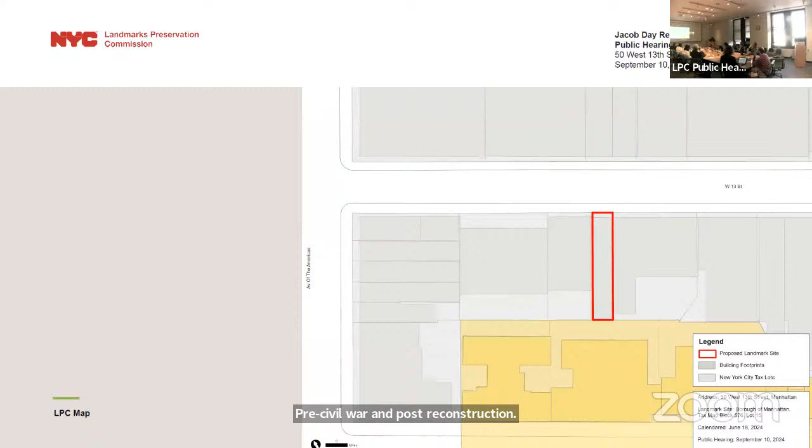The building is located on West 13th Street between 5th and 6th Avenues, just north of the Greenwich Village Historic District. The proposed landmark site is the tax lot.

Jacob Day was a significant figure, both as an abolitionist and a prominent businessman before the Civil War. Abolitionism was a dangerous activity for Black individuals, but despite the risks, Day was a member of the American Anti-Slavery Society, a contemporary of other distinguished abolitionists of the day, and a member of Abyssinian Baptist Church at 166 Waverly Place, a strong supporter of abolition and African-American civil rights that was targeted during the 1863 draft riots.

Day was a successful caterer when this was one of the few profitable business opportunities Black men could pursue. He was a member of the Freedmen's Bank, founded after the Civil War as a means of improving economic prospects of African Americans, and a member of the Caterers Club, along with other Black entrepreneurs who made a name for themselves at that time.

Eventually becoming an affluent property owner, Jacob Day was considered part of New York City's Black elite in the 19th century, at a time when African Americans faced substantial barriers to the building of wealth. He had begun to own real estate as early as 1846 through a land grant in upstate New York given by abolitionist Gerrit Smith, a fellow member of the Anti-Slavery Society, and later owned property in Brooklyn and Long Island. At the time of Jacob Day's death in 1884, he was worth an estimated $200,000, equivalent to nearly $6 million today.

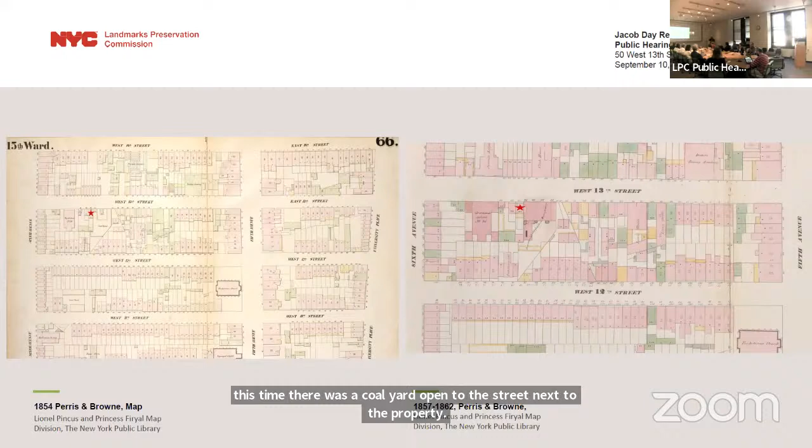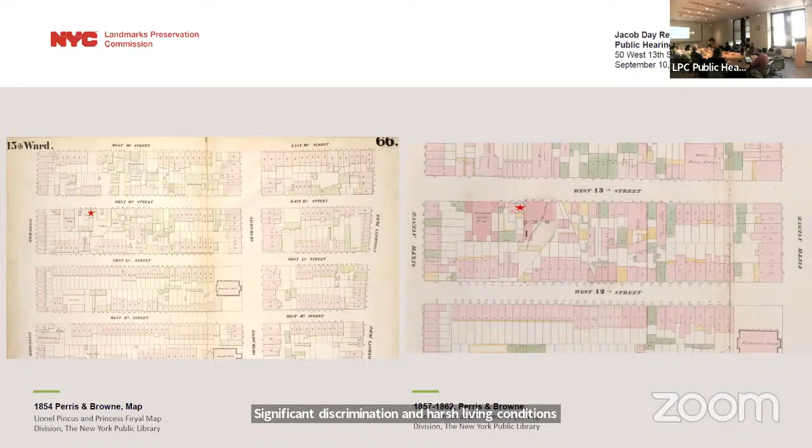At this time, in the mid-19th century, despite significant discrimination and harsh living conditions, Greenwich Village became home to many Black residents, businesses, schools, churches, and benevolent societies. The area around Minetta Lane and Bleecker Street, south of Washington Square, became known as Little Africa.

Census records indicate that Jacob Day rented additional rooms to other African Americans.

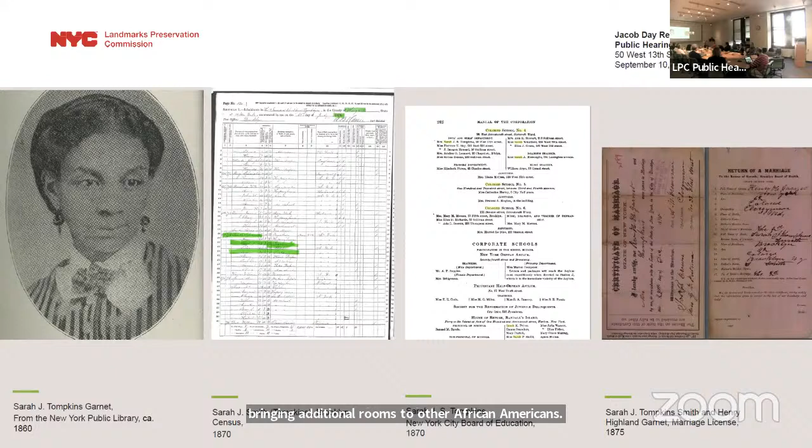According to Board of Education records, prominent educator, abolitionist, and later suffragist Sarah J. Tompkins Garnet resided at 50 West 13th Street from the 1860s to 1874. During that time she was a teacher, and in 1863 was appointed one of the first Black female principals in the New York City public school system, at Colored School Number 4, a designated New York City landmark.

The row house is a rare example of 19th century Greek Revival style building. It retains its 19th century form, materials, and facade configuration from the 40-year period of association with Jacob Day and his family.

After Jacob Day's heirs moved out of the house in 1896, the house had various owners until the 1950s. In 1959, 50 West 13th Street was renovated to create a theater in the basement, a school on the first floor, and apartments above. Among various tenants in the middle of the 20th century, in 1968 a groundbreaking four-member Afro-American folklore troupe had a residency at the theater, performing poetry, folklore, and works of well-known Black writers James Weldon Johnson, Gwendolyn Brooks, LeRoi Jones, and Langston Hughes.

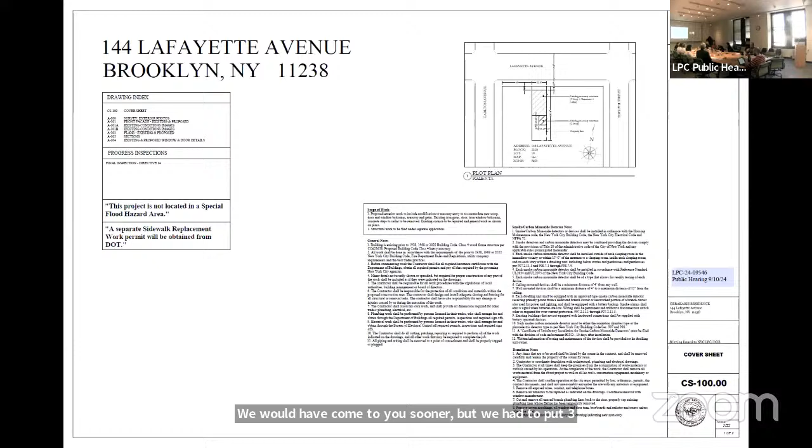This is a brownstone in the Fort Greene area. The top right photo shows the 1941 tax lot photo. Our building is the center one. The building to the right no longer exists, and the building to the left is still intact. Our intent is to focus on the lower floors, the street level and first floor, and bring it back to its original condition. We are the only house on the block without a stoop, and we'd like to complete the look of the block.

The bottom photos show our house to the right, 144. You can see there is no stoop; the areaway is just a concrete pitched patch that's broken and prone to rodents and other problems. The building on the left has a stoop and is a rental unit, but much of its detailing is still intact. The building to the far left, 148, has a stoop but has had some alterations over the years.

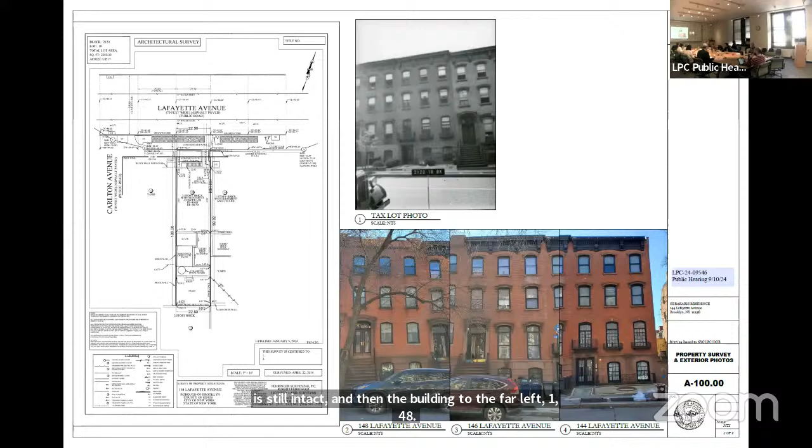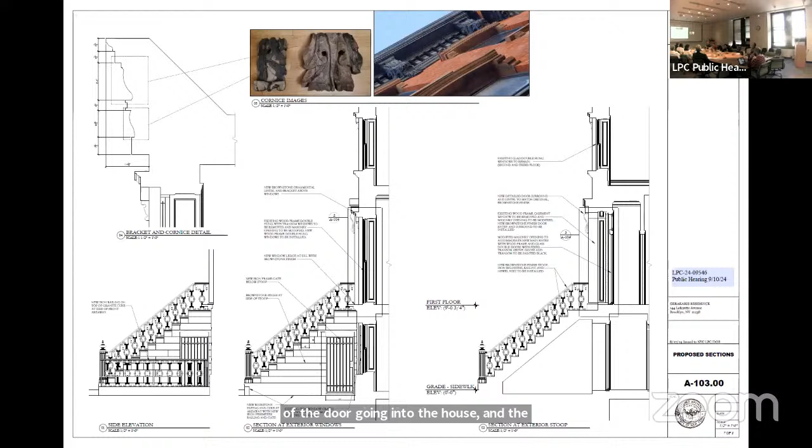The cornice also needs repair. A lot of the brackets have fallen out. I believe that's a staff level consideration. So...

And these are details of the existing versus the proposed. And that's it. Thank you.

Thank you. All right, commissioners, are there questions? Yes, Commissioner Why Goldblum: is this not a staff level approval?

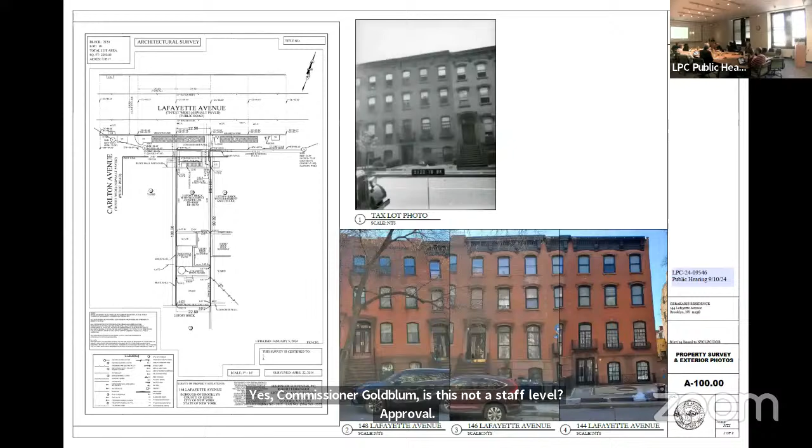So the reason it's not a staff level approval is because when the stoop was removed and the three windows were created, that was a layer of the building's history. And so it's before the commission for us to determine whether it is appropriate to remove that layer of history to restore the stoop. Thank you.

If I could just add one piece to that as well. Also, the windows being proposed are 1/1 aluminum clad wood windows, and a house of this style would have almost definitely originally had multi-light of some variation. So even though it doesn't currently at its upper floors, and I don't think any of the neighbors do, they were changed over time. Staff level rules would have required something like a 2/2 or a 4/4 of that period. So it's the request to remove the later alterations, as Sarah mentioned, but also that particular window configuration.

Yeah, thank you, Corey. All right, any other questions? Let's see if we have public. Do we know when the later alteration was done?

Corey? The report kind of implies it's early 20th century. It looks maybe Neo-Georgian or something like that, but the report doesn't speak of them other than to say that what happened removed the original stoop and parlor floor lintels and sash. Got it. Okay. All right.

Is there anyone in the room who'd like to speak on this item? All right. Not seeing that there is, I'm going to turn it to Gregory to see if we have any remote participants.

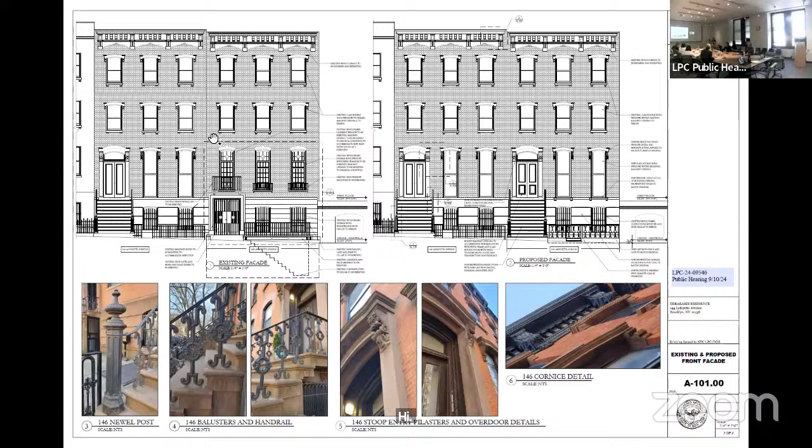Thank you. We'll move to the next item. Next item is public hearing item number 2, LPC 25-01205, an application for a certificate of appropriateness in the Borough of Brooklyn, block 1856, lot 26, 192 MacDonough Street in the Stuyvesant Heights Historic District. This is a French neo-Grec style row house designed by Arthur Taylor and built in 1888. The application is to construct a balcony at the rear facade.

Hi, good morning. My name is Krista Diaz. I'm here on behalf of Adrian Diaz.

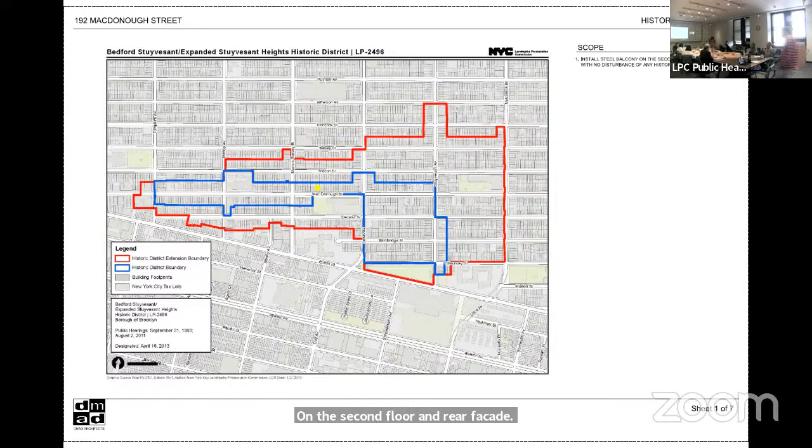In this slide, CAD drawings of the rear facade before and after. And then here you'll see the second floor plan before and after.

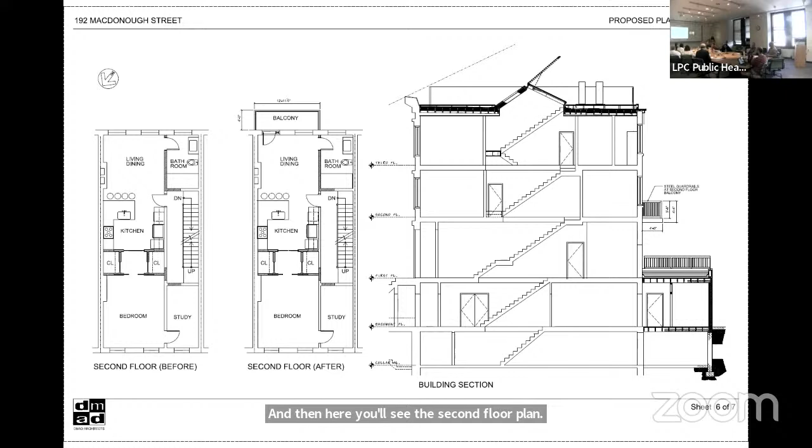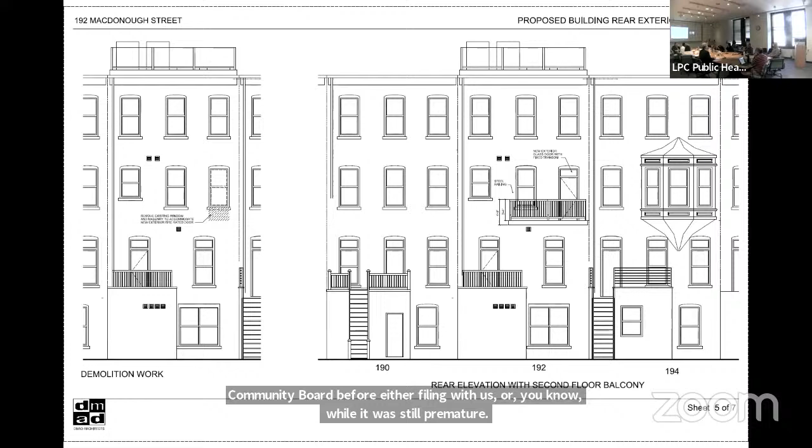Yeah, you touched on most of it, but I think this is one of those cases where the applicant went to the community board before either filing with us, or while it was still premature, and showed an entire scope of work. Since then, the staff reviewed that and determined it was only this balcony that couldn't be made to meet staff level rules. But it's also fair to say some of what was shown to the community board was adjusted to meet staff level rules. So some of their comments no longer apply, and what staff approved is not necessarily what the community board saw. So all to say that the current scope of work before you, which is just the balcony, is the only thing before you. And we've actually issued permits for the remainder of the work as adjusted.

Okay, thank you. So would you like to respond to the comments we've heard about the balcony? I think there were concerns about noise and privacy, which are not actually issues that are under our jurisdiction. But to the extent that there are other projecting elements in the rear facade that provide context for it, that might be something you'd want to talk about. And come up to the microphone.

I can't really speak to this that much. My father is the architect on the project, and the owner isn't as well versed in what's happening since it's also a family member. So my dad has been taking care of it. That's probably why when he ran into the owner, they weren't really able to speak to what was happening with the actual balcony area.

Regarding noise complaints, we still have a backyard, so if we're going to remove everyone's backyards, I guess that would alleviate all the noise complaints. But in regards to privacy, it's not going to be that large of a balcony where you'd be able to see into everyone else's backyards. It'll probably be about the size of a fire escape. I don't think there are necessarily a lot of privacy issues there. Also, MacDonough Street doesn't necessarily have balconies, but there are other streets with balconies at the back of their brownstones, so I don't see it as a major concern.

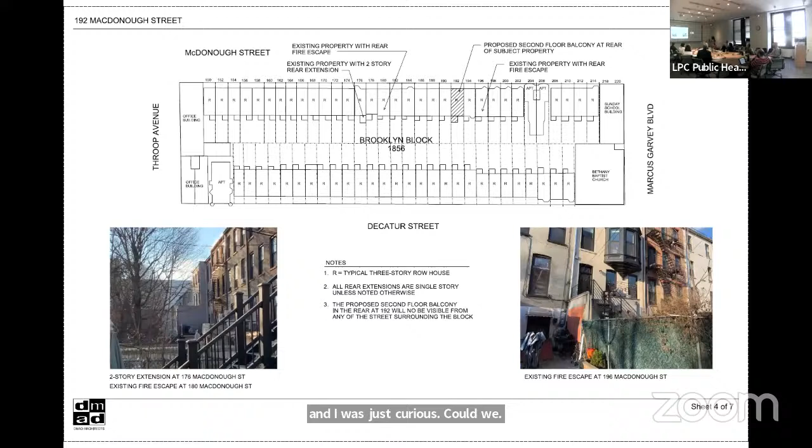The question: the window that's to the left of the balcony, was that altered at some point before or after designation? Do we know? It's in bad condition under the windowsill, and I'm curious, could we bring that back to the original? We could, though I think it would be very hard to know if it was done after designation because it's a non-visible rear facade. Also, just to note, when a secondary facade is not visible, staff level rules allow for a variety of changes to openings that don't always result in a matching pattern or symmetry. Okay, thank you.

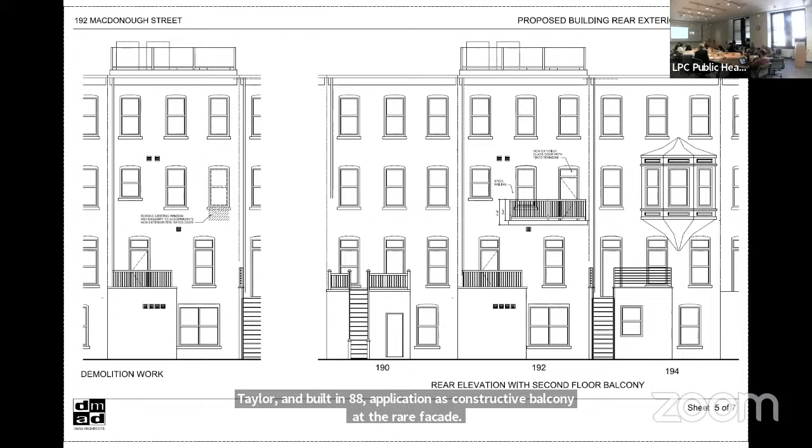Sure. In the matter of a certificate of appropriateness, Borough of Brooklyn, LPC 25-01205, 192 MacDonough Street, Stuyvesant Heights Historic District, Block 1856, Lot 26. A French neo-Grec style row house designed by Arthur Taylor and built in 1888. Application is to construct a balcony at the rear facade. I note that the building's style, scale, materials, and details are among the features that contribute to the special architectural and historic character of the Stuyvesant Heights Historic District.

I recommend approval, finding that the proposed work will not eliminate or damage any significant architectural features, that the proposed balcony installation at the rear facade will not be visible from a public thoroughfare, that rear facades of other buildings in the block have projecting elements that were added over time, including decks, fire escapes, and oriel windows. Therefore, the proposed balcony will be in keeping with this varied context, that the metal balcony will be simply designed and of a modest scale, and the open quality of the installation will not overwhelm the rear facade, and that the work will not detract from the special architectural and historic character of the building or historic district.

Thank you. And Commissioner Goldblum, would you second that motion? Second. John, will you call the vote?

Chair Carroll, aye. Vice Chair Bland, aye. Commissioner Chapin, aye. Commissioner Chu, aye. Commissioner Ginsburg, aye. Commissioner Goldblum, aye. Commissioner Jefferson, aye. Commissioner Lutfi, aye. Commissioner Master, aye. Nine in favor, none opposed. The motion passes. All right, that's approved.

Thank you. We'll move to the next item. Next item is public hearing item number 3, LPC 24-10610, an application for a certificate of appropriateness in the Borough of Brooklyn, Block 1143, Lot 67, 123 St. Mark's Avenue in the Prospect Heights Historic District. This is an Italianate style row house designed by John D. Porter and built in 1870 to 72. The application is to alter masonry openings at the rear facade and construct a rear yard addition.

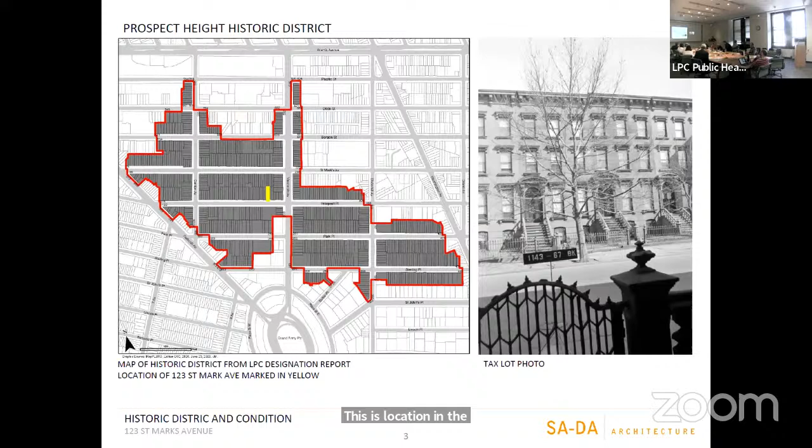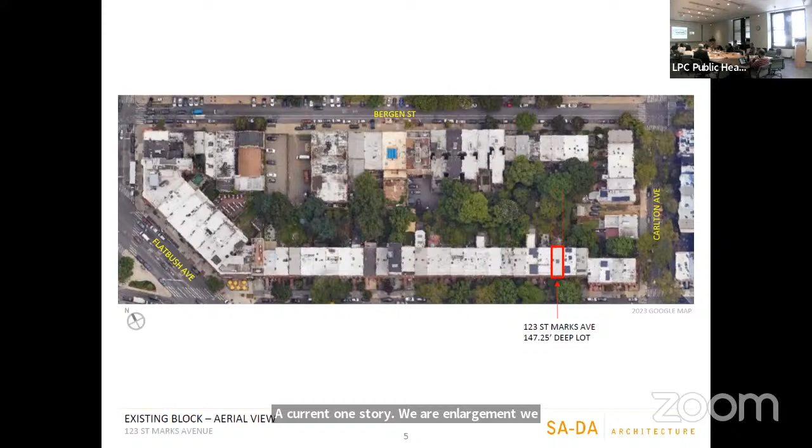This is a location in the Prospect Heights Historic District, in the tax lot photo. This is an extraordinarily deep lot, 147 feet deep, taken from the front facade, and not even from before that. So it's a remarkably deep area that has a current one-story rear enlargement. We are proposing to take down the rear enlargement. This slide shows that what we're proposing will result in an 85-foot rear yard in the end, still remarkably deep for even this area.

And this is showing some of the vantage points that are at issue here. Not only, again, are we doing the one-story? It's only a basement one-story rear enlargement. We are proposing to change the windows on the parlor floor, which I will go over with you.

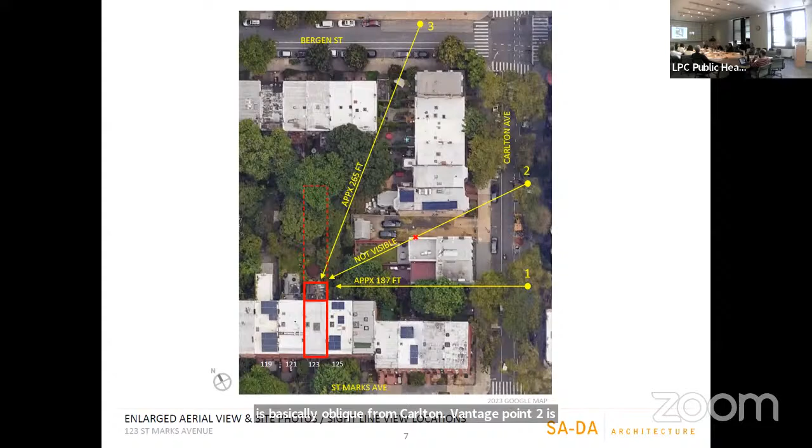These are the vantage points. One is from Carlton, and if you look back at this, vantage point 1 is basically oblique from Carlton. Vantage point 2 is non-visible. Vantage point 3 is partially visible for the parlor floor only. I will illustrate that to you.

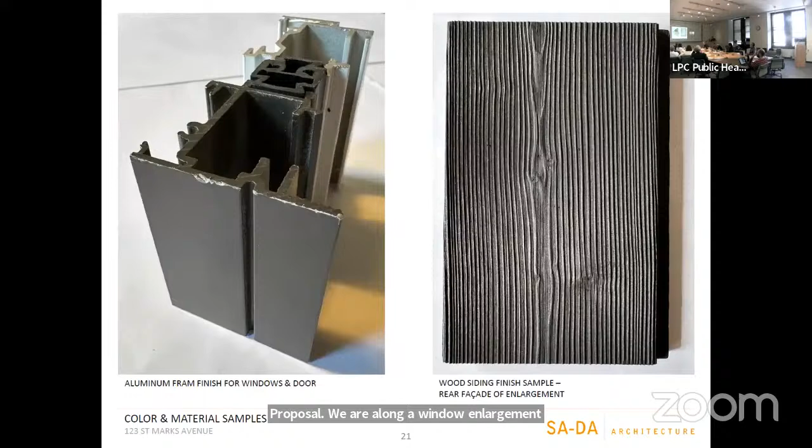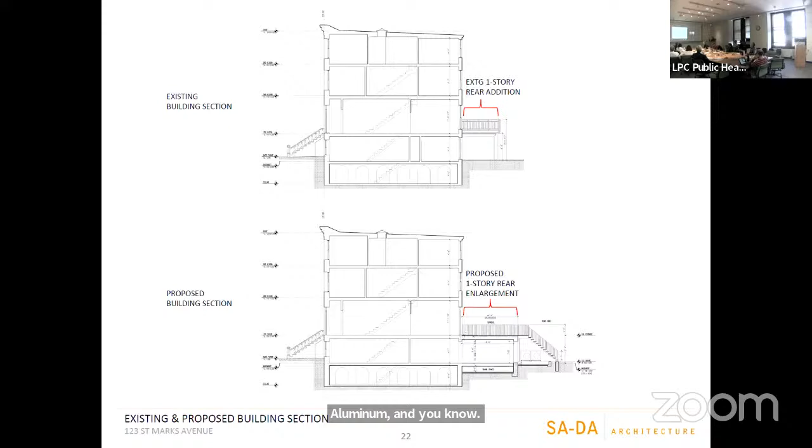These are the materials of the rear that we are proposing, aluminum and a wood back. Anybody wants me to go slower, I will. We did a mock-up as required.

It's very clearly not visible for the one-story rear enlargement. And there's just no visibility today with today's foliage. But if you look back at the original photo that I showed you, it is visible, seasonably, minimally visible. That's the term.

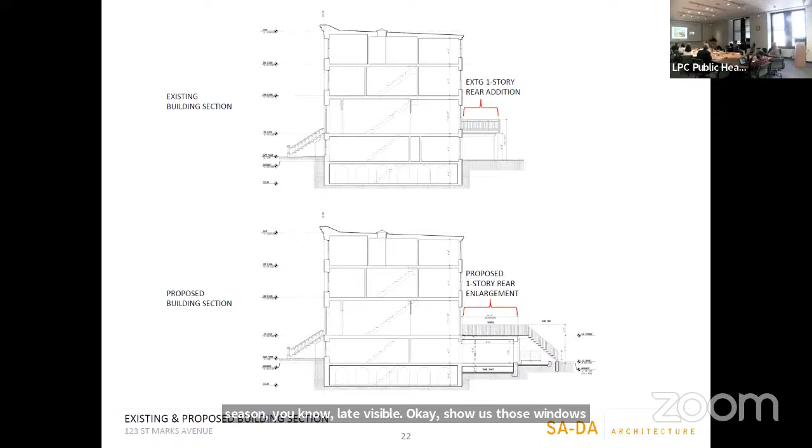And happy to just go the back, parlor floor window that's minimally seasonably visible. Could you show us those windows again? You just showed it. Do you have a rear elevation? Is there an actual elevation, not just drawing? Just a moment. Yes, there is. Sorry, I went through it very quickly, because I wanted to show you the interior.

But it should. As I mentioned, though, I wanted to bring it down because we have to do a lot of shoring to make sure that the facade would be very, very solid when they put the additional steel to reinforce it. I wanted to make sure there was nothing that would destroy the molding on the interior.

Okay, I'm troubled by that too. Explain that more. Why can't you just keep the lintels where they are and the height? We could. I was just concerned that if we were all the way up here, we're gonna put two pieces of steel, which would have to be two I-beams, and we'd be getting fairly close to the molding, which is up here. I was concerned about that steel shoring.

Can you show the interior again? Is it before? No, I'm sorry, before this. Before this, right? Also, there's an AC. Well, you have an air conditioning system. That can be moved. Sorry, here we are.

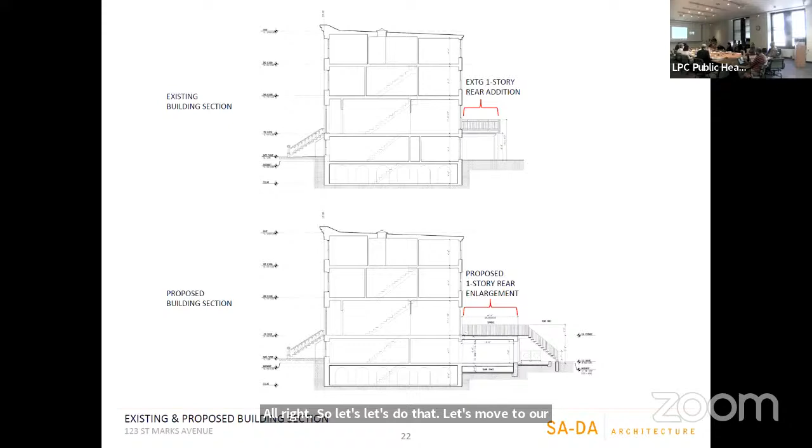All right, so let's do that. Let's move to our discussion. Commissioner Jefferson, would you make a motion to close the hearing? Thank you. Commissioner Chapin, would you second that motion? Second. All in favor, say aye. Aye. Any opposed? Okay, hearing is closed.

So this is a proposal for a 1-story rear yard addition in an unusually large or deep rear yard. There's still, I think, 85 feet of rear yard remaining. The addition doesn't project out as far as other additions within the block. And then above that, they're proposing to combine masonry openings to create a new masonry opening that would have a door and a window.

I think we've focused a lot on the interior because you presented it to us. But stepping back, we have to think about what our role is here and what we've approved in the past. We've certainly approved a variety of window configurations and combinations in rear yards. This particular one has some visibility - it's an oblique view, seasonally visible, which you can see in the handouts. You would not see the rear yard addition, as I understand it, but you might catch a bit of the parlor floor. So we'll begin our discussion on that.

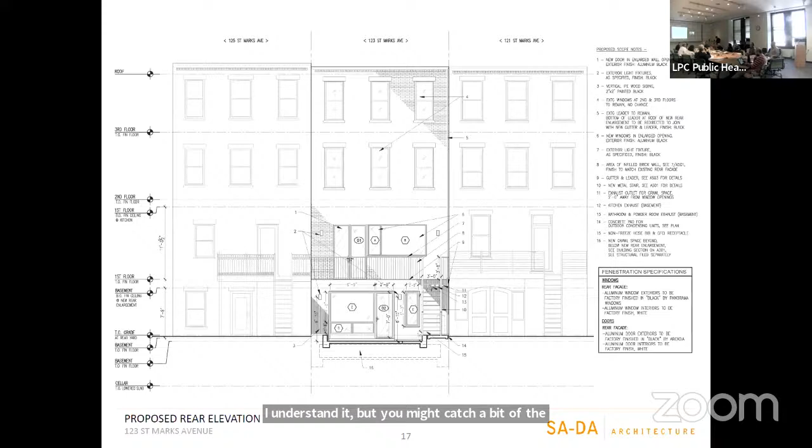Commissioner, let me see, where do I want to go? Commissioner Ginsburg, would you like to start this one? Okay, so I think the addition is fine. I'll be interested what my fellow commissioners say, but I think we should probably keep the same head height of the windows and not do any infill, basically. We can cut to make the opening larger and down so that there's access, but it should be possible to do that hopefully without damaging the molding, but one can also, if there's any damage to the molding, document it and repair it as needed. Okay, Vice Chair Bland.

Yeah, that's my position, I think, as well. Certainly no problem with the addition itself. You know, almost every Tuesday, we look at ways that the bottom two floors of a brownstone have been changed, and often very elegantly, often with a lot of glass that we sort of, and the neighbors all, have to be careful about. But the problem for me on this one now is what's being proposed looks like what might have been done before designation, with no elegance or skill or style. It just looks haphazard, I guess. There's no style to it.

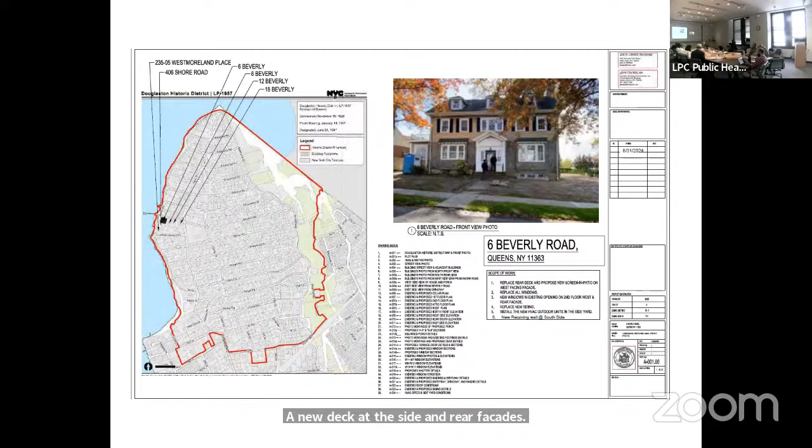Morning, Commissioners, Lisa Schaefer, Preservation Staff. The application for 6 Beverly Road is to construct a porch at the side facade, a new deck at the side and rear facades, and to install aluminum clad windows. So the new porch will be over here on the side and the deck right behind it.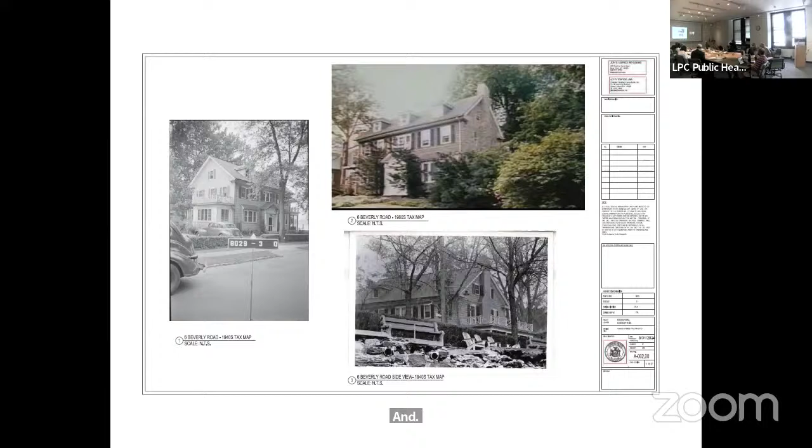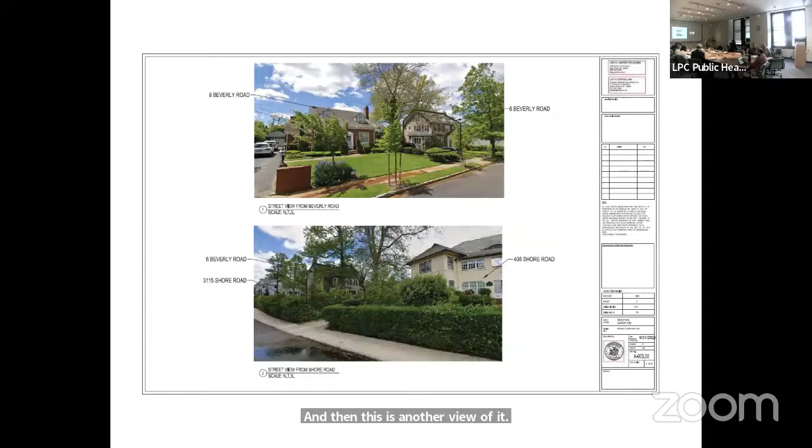You can see in the historic photos there was actually a porch at that location, and here's another view of it. These are just the neighboring houses. Also, some work was done on the site without permits, including construction of a retaining wall. However, the wall does conform with the Douglaston Master Plan, and therefore will be legalized at staff level.

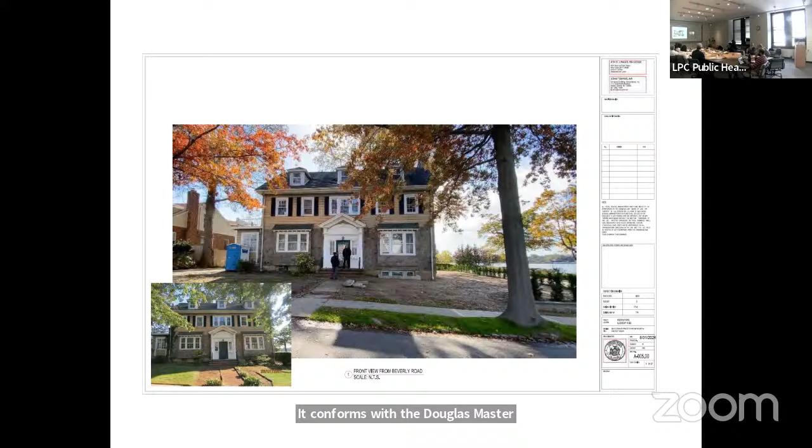This is the rear of the house where a deck also existed previously; it was removed and is now boarded up. I just want you to note there were glass doors there, and a new window, which you'll see later, will be put in its place. Just another view.

So here on the bottom, that is the proposed porch, and it will be similar in design to the historic porch. In the side elevation, the new deck will have a railing which will match the railing on the porch, based on the historic railing at the rear. And then here at the rear, where there was the sliding doors, there's now going to be an oriel window.

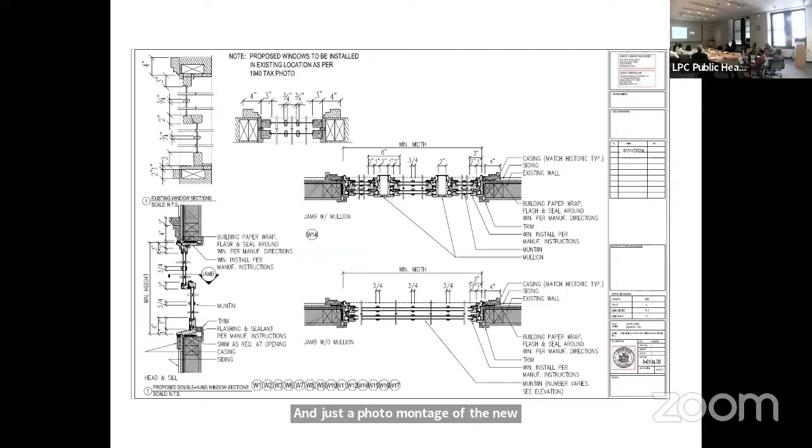Some details of the proposed porch, with the post and railing, and behind it will be screening. And just a photo montage of the new porch and deck. Then the proposed aluminum clad windows, which will match the configuration, operation, and details of the historic windows. And that's the proposal.

There's a bunch of work being done which is restorative and complies with the master plan and will be reviewed at staff level. Thanks, Lisa. All right, commissioners, any questions?

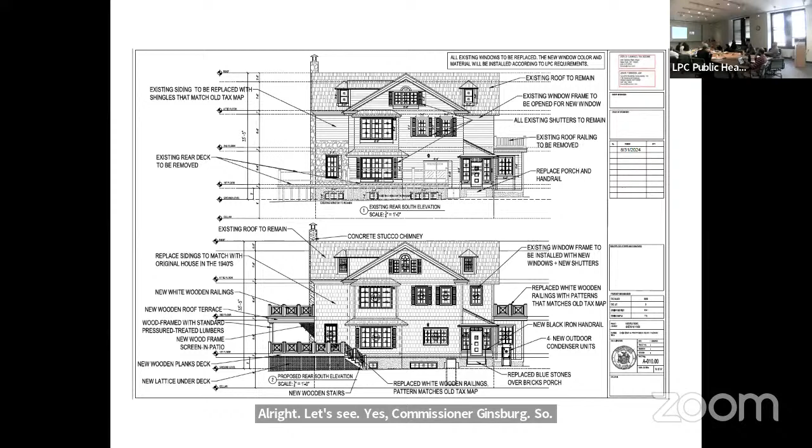All right, let's see. Yes, Commissioner Ginsburg. So was the old porch removed after designation? No, prior to designation. Thank you. All right, any other questions?

Yes, Commissioner Jefferson. What page is this? A009.

And there was this wood frame with a... you have a screened in porch, right? At that side, at the proposed west side elevation. And then you have a screened in porch, new screened in patio that matches 1940s tax map 80002. Is there a wall behind that, or is it... it's the screened in porch hits the column, right?

The new screens line up with the column. So Lisa, maybe the section that shows where the screens are, right behind the columns. So they seem to go from the ceiling to the floor right behind the columns. Yeah, so the railing is attached at the base and capital at the rear part of the posts. Also, they're in back of the column, right? Yes. Okay, thanks. Okay, I understand.

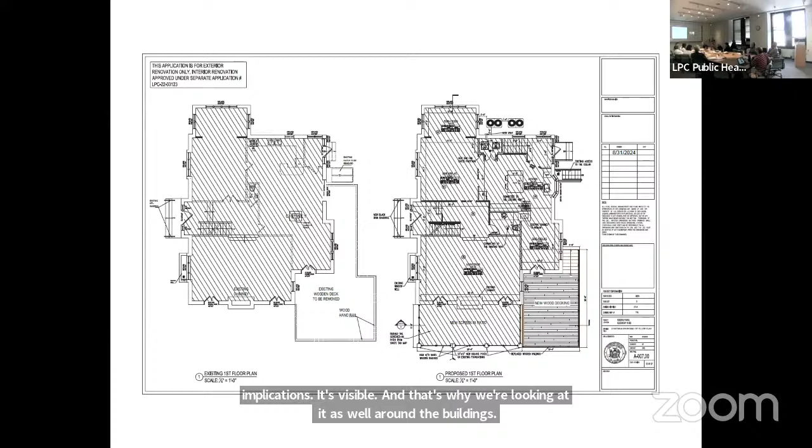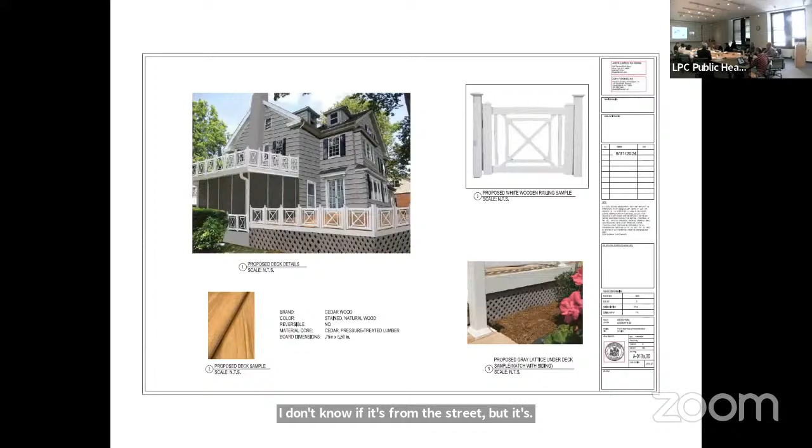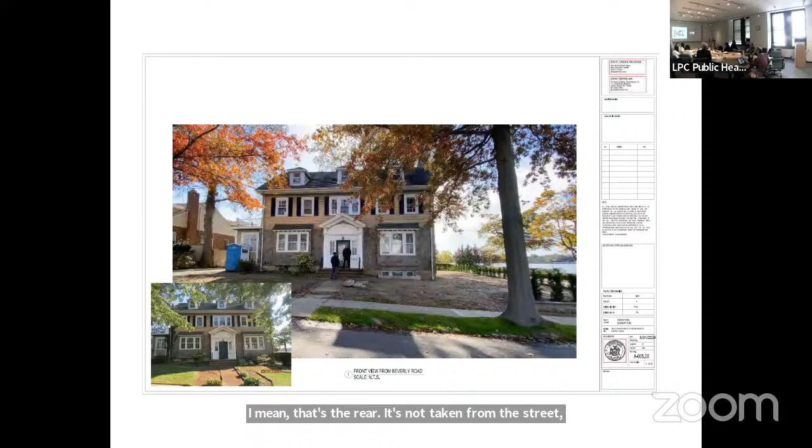Lisa, is there a photo of that rear facade as you see it from the street? Yeah, I don't know if it's from the street, but there's... yeah, that's the rear. It's not taken from the street, but it's completely open because it's a corner lot. You can see behind it, there's nothing there.

All right, and are there any other oriel windows on the building, or is it... There are bay windows on the building. Okay. Yeah, are they also, so is it... they go all the way down to the ground? Yes, three-sided though as well.

They're square rather than canted - they don't have the canted shape. I see, they're little projections, do it in the front. So they're squared projections? Yes. Okay, and on the back? And also on the back of the oriel facade. Okay.

All right, any other questions? Just to clarify, Commissioner Goldblum: the scope of the work, which I assume is being handled at staff level, is the removal of the clapboards, the removal of what I assume is fake stone, and the installation of new cedar shingles and new trim also? Yes. Super, thanks.

Right, and so the scope for us is the reintroduction of a porch that would have a railing on top that would match the historic railing, but they also want that railing at the bottom and the deck behind it, and the oriel window, and the aluminum clad wood windows.

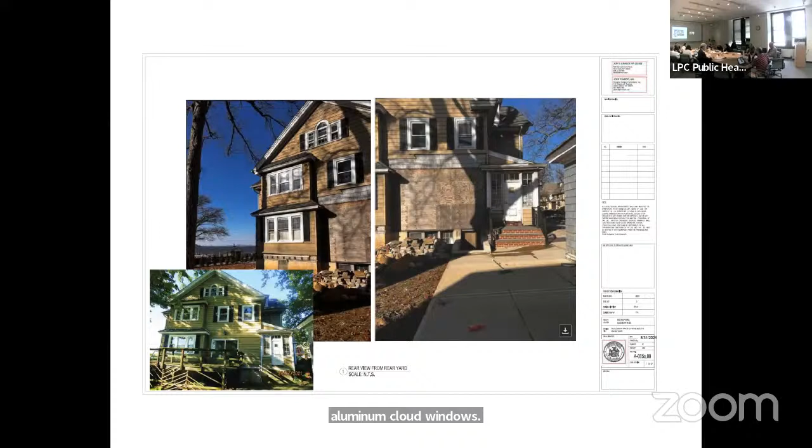Okay, all right, let's see if there's any testimony. Is there anyone who'd like to speak on this item? All right, noting that there isn't, I'll turn it over to Gregory to see if we have any remote participants. Thank you, Chair Carroll. I do not see any hands raised for this item. If you'd like to speak on this item, please click the raise hand button now. Okay, there are still no hands raised.

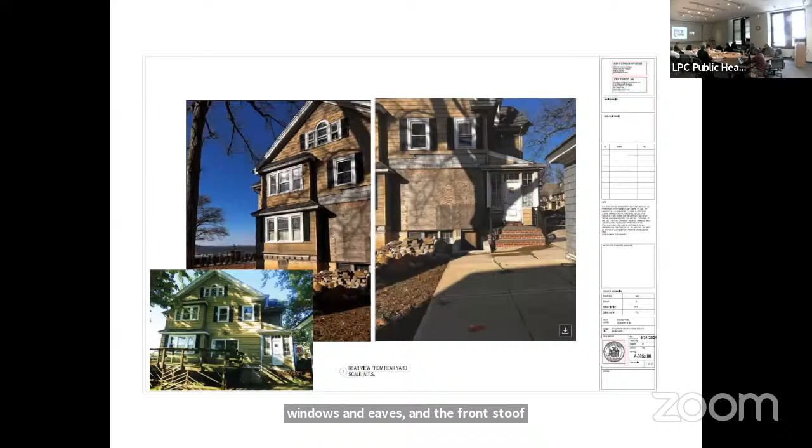So I will note for the record that Queens Community Board 11 recommends approval with noted suggestions regarding the shutters, porch screens, lattice skirting, window trim, roof, soffits and eaves, and the front stoop railing. And with that, I'll bring it back to you, Chair Carroll. Okay.

So would you like to say anything at this point or respond to the community board suggestions? If you do it, just come up to the microphone because the people on Zoom can't hear you unless you speak into the microphone and state your name for the record. My name is John Tessaris. My office was retained to get the letter of appropriateness.

Our client is deeply passionate about this house, to restore it back to what it was, back from when it was constructed. It's been a long process, so they're very anxious to get in there. And it's a beautiful house, I mean the neighborhood's beautiful. So they welcome suggestions - Lisa's been great with everything. So that's pretty much what the client wanted us to say.

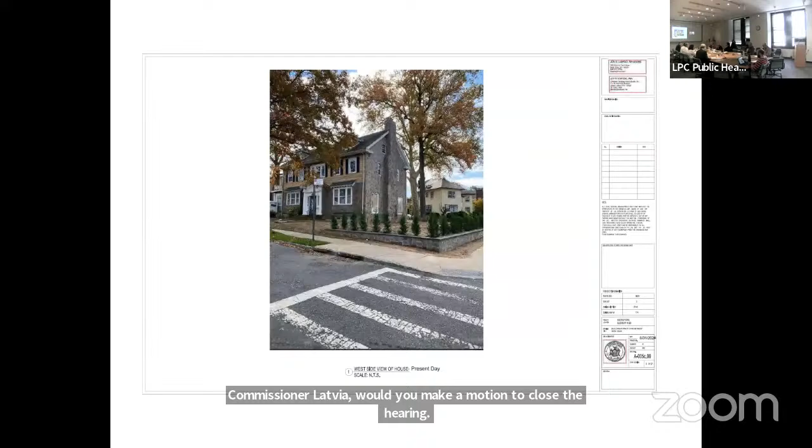So again, there's a lot of restoration work happening here. The proposal before us is to restore a porch that had been removed prior to designation, with a railing that would match the historic railing, including replacing the railing on the addition on the other side to match. The railing at the lower level of the addition of the porch would match that detail too. The proposal also includes the deck behind it, the oriel window, and aluminum clad wood windows throughout, a type of window we've approved in this historic district given the setback from the street that many of these houses have.

Vice Chair Bland, would you like to start? Sure. Really a very majestic house that's been badly treated over time, with an owner apparently who has passion to restore its 1912 original, more or less original look. So I think we have a very positive review of all of this from my point of view.

As we've said, the windows being replaced with wood clad seem fine and consistent with the setbacks. I think the new porch is terrific. And the oriel window, which I noted some of the staff had issues with, I don't have an issue with it. It seems fine to me. It's in the rear of the house. It's not exactly like the other windows, but it's also not on the same facades, so I'm okay with it as is, and I laud really the whole presentation.

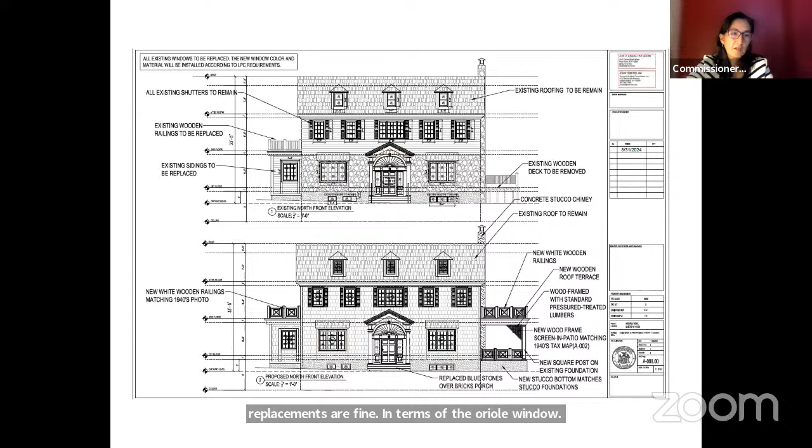Commissioner Master: what a great project. I'm so happy that the applicant is putting so much care into this. I agree that the porch addition is fantastic. The window replacements are fine. In terms of the oriel window, I'm fine with it as presented, although I think Commissioner Goldblum made some really good suggestions as well. So I think it's appropriate as presented.

I also think the work is wonderful and it'll be a great restoration with additions that are very sympathetic and harmonious with the original style. I am also fine with the oriel being different, as it's in the center of the rear facade and on a different facade. But I think that in working with staff on the details, there can be ways, as Commissioner Goldblum suggested, at the roof or the base, to make it sort of relate better to the architectural details on the building.

So Vice Chair Bland, shall we do a motion to approve? Oh, you got it. Okay. Motion to approve, and we'll just do a recommendation that the applicant work with the staff on the details.

Okay, in the matter of LPC 23-04171, 6 Beverly Road in the Douglaston Historic District. This application is to construct an addition and deck and replace the windows.

I note that the building style, scale, materials, and details are among the features that contribute to the special architectural and historic character of the Douglaston Historic District. I recommend approval, noting that the removal of the deck will not eliminate any significant protected features from the rear of the house, that the size, location, and presence of the new deck will be harmonious with the scale and architectural character of the house, that the proposed porch with decorative wood railings will closely approximate the historic porch originally in this location and will be harmonious with the house in terms of materials, details, and finishes. That the historic windows and change in materials will not be discernible from the street, that the proposed work will not detract from the special historic and architectural character of the house or the historic district. And I recommend that the applicant work closely with staff, particularly perhaps on the oriel window, but on all aspects of this, to achieve a salubrious result.

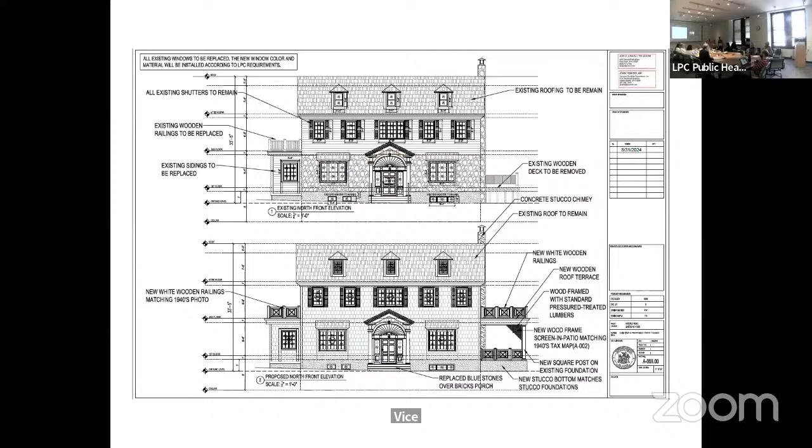Thank you, and Commissioner Ginsburg, would you second that motion? Second. Thanks. Chair Carroll, aye. Vice Chair Bland, aye. Commissioner Chapin, aye. Commissioner Chu, aye. Commissioner Ginsburg, aye. Commissioner Goldblum, aye. Commissioner Jefferson, aye. Commissioner Lutfi, aye. And Commissioner Master, aye. None opposed, the motion passes.

Okay, that's approved, but please continue to work with the staff on the details for all aspects of it. Okay, we'll move to the next item.

Next item is public hearing item number 5, LPC 24-08053, an application for a certificate of appropriateness in the Borough of Manhattan, Block 517, Lot 11, 153 to 159 Sullivan Street in the Sullivan Thompson Historic District. This is a Romanesque Revival style church building designed by Arthur Crooks, built in 1886 to 88. The application is to install HVAC equipment and planters, relocate and replace statuary, and install signage.

Morning, my name is Janine Smith. I'm with Rimkus Consulting. We're here on behalf of St. Anthony of Padua Church, located at 155 Sullivan Street in the Sullivan Thompson Historic District. So I'm just going to jump in. I know it's before lunch, so I won't take up too much of your time.

Building located right on West Houston Street and Sullivan Street, right at the corner. It's notable that within our presentation we included a lot of historic information, so feel free to read through it when you have time, but I'm going to skip over most of it.

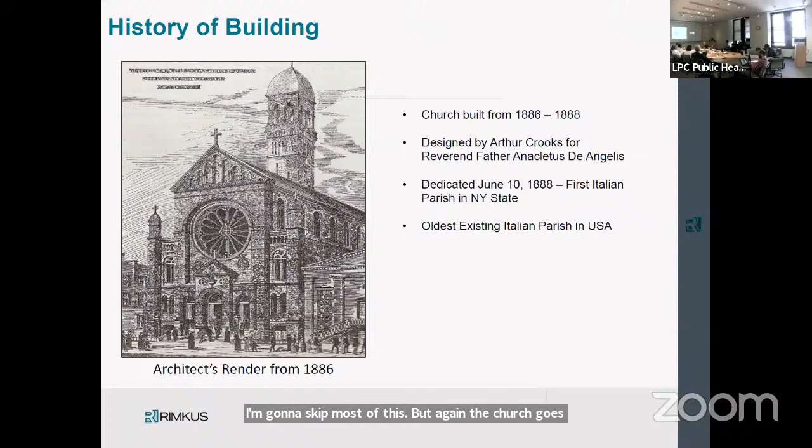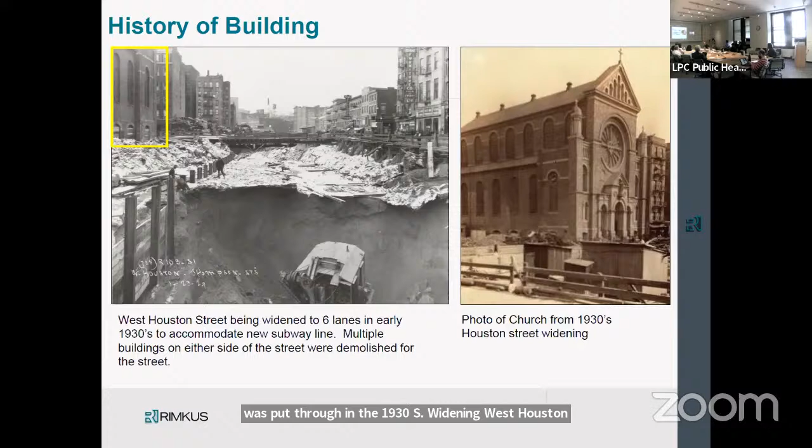I'm going to skip most of this, but again, the church goes back to 1888 and is the longest standing Italian Catholic church in the city. It's notable that the facade the courtyard fronts is actually an accidental facade. When the subway line was put through in the 1930s, widening West Houston Street, the lots adjacent to our church were knocked down. As a result, we have a now primary and prominent facade that was never intended to function as it does.

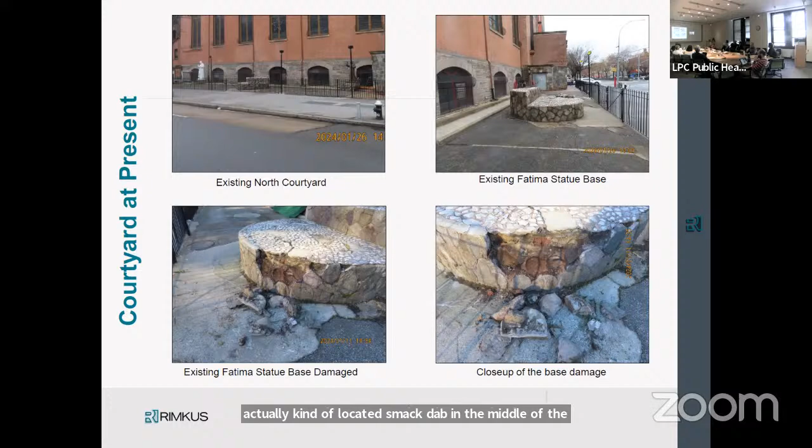Take note that as it stands right now, that base is actually located smack dab in the middle of the distance between the street and the church facade. That's notable as we are looking to adjust that.

The paving right now, as far as we know, the only historic paving going back to at least the 60s is this asphalt. It's in rough condition. From a New York City code standpoint, we've definitely got some trip hazards, and it's also not facilitating the watershed we would like to see. So our goal here is to update that. You can also notice that along the church facade itself, we have two layers of concrete walkway that right now are creating a nice little trough for rodents to drink water from. So we want to correct all of that.

This sign, which was removed in 2021, as far as we know, is the only other historic sign. Again, that's no longer in place, but as you can see, it was kind of impacting the primary facade in a significant manner. I think most of us would agree, not the prettiest thing.

So we're proposing something a little different. You can see just to the right of that, there's a relief of St. Anthony, which we believe to be at this point 30-plus years old. We're looking to just move that slightly to the side and install the signage alongside it. You can note just below it, there is a lighting fixture, which we're also looking to update.

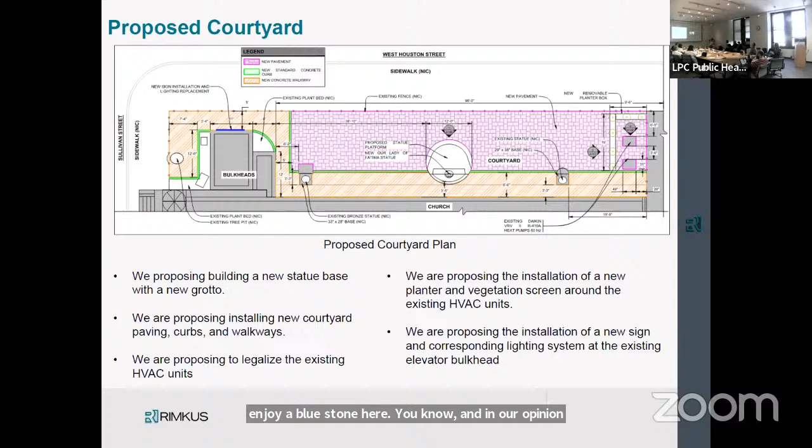So this will all look like this, except realistic, right? As you can see on the far left side of the image, the trees we're looking to put in are evergreen trees. They do have a maximum height - they're a dwarf spruce variety, and they get to about the height of the HVAC. The base itself may be a little hard to tell from this image, but it is notably taller.

Our intention there is multifaceted, and we'll get into that in a moment, and it also includes a grotto, which goes back to Our Lady of Fatima's historic presentation. And then lastly, the adjustment of the placement of the relief and the new signage and replacement light fixture at the bulkhead.

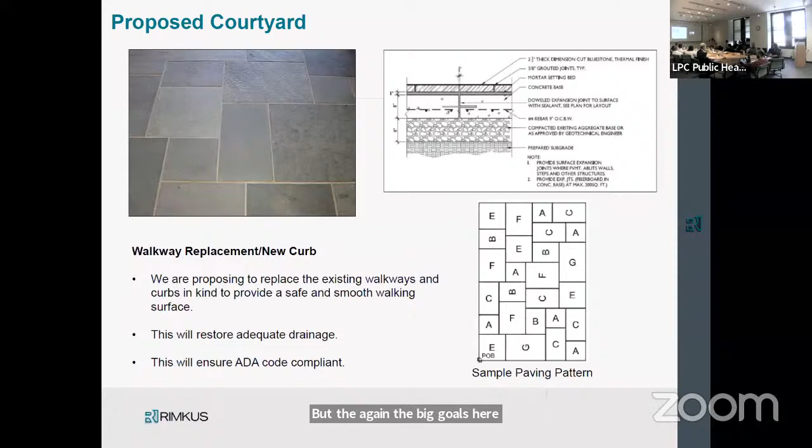As we said before, in working with the community board, we had originally said we'd just update the asphalt, but the community board was strong-minded, and we came to agree with them that a bluestone courtyard would be lovely here. If you're interested in how we intend to achieve that, we've provided that information here. But again, the big goals here are providing adequate walk space that is safe and code compliant and adds adequate drainage for the site.

Again, we noted earlier that Our Lady of Fatima has had a troubled history, and we have some vandalism that happened that we have on camera in 2017. Luckily, she was mostly still intact, a little worse for wear, but she continued to serve. But just last year, unfortunately, the worst happened - she was not only toppled, cut off at the ankles, but also beheaded, and her head was carried off. A little shocking, definitely, but you can see the need for what we're proposing.

So again, the goal here with the base is by raising it, we're looking to add a little bit of physical deterrent. We're going from a 2-foot tall base to a 5-foot tall base, so it would take a little upper body strength that I certainly don't have just to get up there. And then also by centralizing it, lighting it up, and giving it height, we're providing a little bit of visual deterrent in that if you try to do something, you'll be seen by all of West Houston.

Again, just a quick rendering as to what that'll look like. As you can see, much taller, centralized between the two windows, and then presented. You can note that stone grotto presented within the historic traditional Catholic presentation of Our Lady of Fatima.

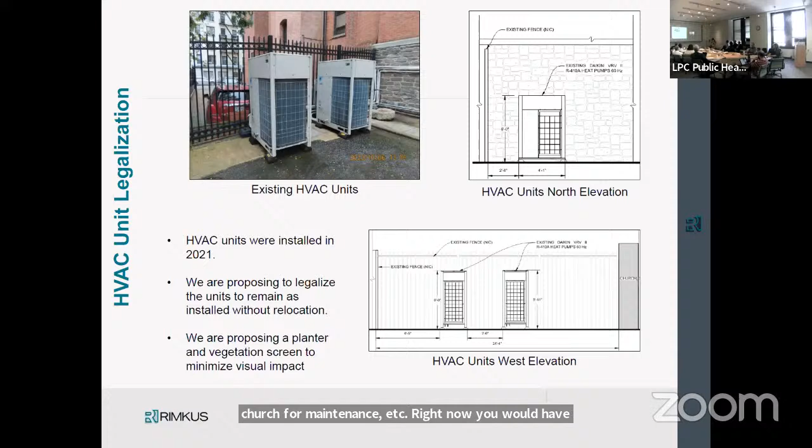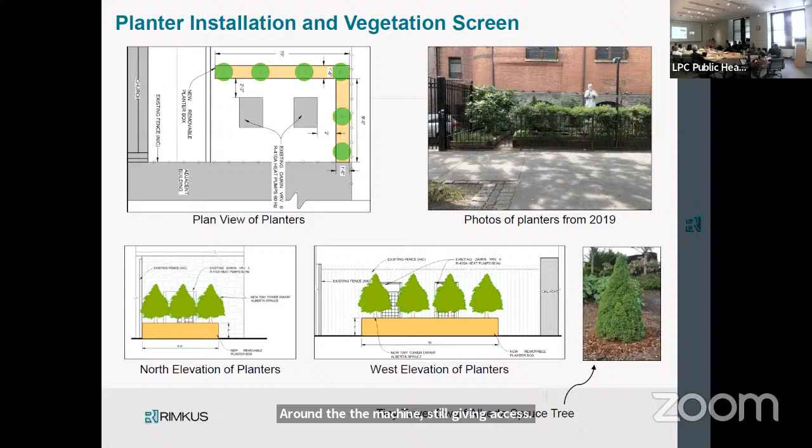So we understand they're not pretty and they're on now a primary facade. Our goal here is to pick up what has been done in this courtyard going back to when it's been exposed. In previous photos we've seen trees, different plantings. The most recent version in 2019 has been larger trees, larger shrubbery within planters in the courtyard. So we're looking to reestablish that with purpose around the machines, still giving access for workers against that primary facade, but blocking it off from most view. And that's kind of everything.

Any questions? All right, great. Thank you very much, it was a very thorough presentation. Questions, Commissioner Chu? Yeah, I have a couple questions. Also, thank you, very thorough and very precise. I think you may have answered a lot of questions through just your very detailed presentation.

I just wanted to know, what is the increase in height of the statue? Sure, I see a 2-foot increase in diameter. Yes, so we expanded it a bit width-wise, but we've also adjusted. I don't believe we have the existing shown.

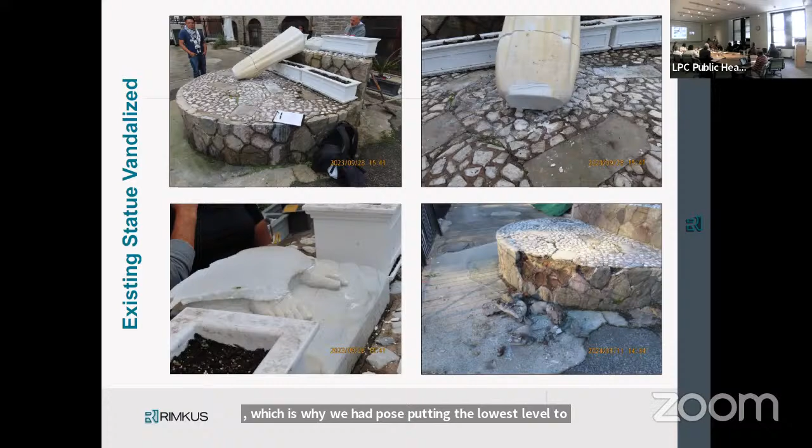The existing is like this 2-step one. You have to go up to the front to the mic if you want to—yeah, we have, this is Michael, he's my colleague. So if you can see here, the existing base was a 2-level with Fatima on the upper level. The lower level is just under 2 feet, you could literally just step on it, which is why we proposed putting the lowest level to at least 5 feet now. So instead of something you could step on, you're looking at something about roughly this tall, well, roughly my height. And a bit of the grotto surrounding it.

That grotto goes up to, I believe, the tallest height of 14 feet, which is still below the height of the sill of the windows—the stained glass windows. It is below, but we are locating it again between 2 windows so as not to take away from the impact of the windows.

Okay, and can the public access the gateway to go into this space? The gateway right now is on West Houston, so it is accessible. The intention, however, is for the courtyard to be accessed by parishioners.

Last question: the church had an addition of this brick volume with the sculptural piece and the sign added later. Do we know when that was added? If you look at the facade, I think it's the elevator bulkhead, where you want to put the sign—I think it was added sometime after the 1930s, right? So, sorry, yes, the elevator bulkhead here, we believe this was added in 1980, is that correct? Oh, 1980.

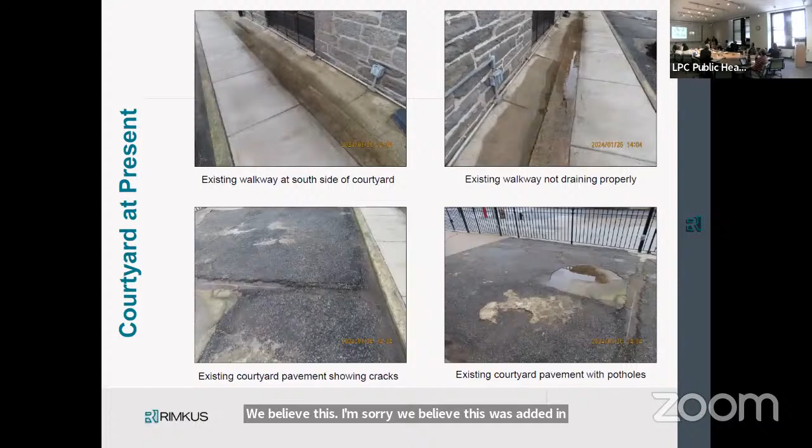And that's where you had a precedent of the signage there. I'm sorry, the precedent of signage was in the 1966 photo, and there was just a little bit of it. Is there a photo of finding that? I didn't see a photo. Oh, if you just go here, it's next to the bay closest to the street. So it predates the bulkhead that was on the south corner. Okay, I understand now.

All right, Commissioner Jefferson. A great urban concept, this statue park, as I call it. I have a question on the proposed courtyard elevation.

Is there any green in it at all? Only covered up with mechanical equipment, or is there more green in that courtyard? Are there other plantings in the courtyard?

At present there isn't, but the intention is to return it to its previous state, which was filled with greenery, basically the entirety of its existence that we know of. So yes, there would be greenery surrounding the HVAC, but that would be more transitory, seasonal placements, temporary concept planters.

Now it's a hard courtyard, hard material, correct? Right. But it sounds like they'll have some plants, potted plants, to cover the equipment elsewhere. Yeah, which is a different language.

This is Father Michael Corsioni. Hi, I'm the pastor. This is the last two years now.

The reason why we took all of that stuff out was the rats. We were getting tickets every other month for harboring the rats. And all the restaurants were feeding them and we were harboring them. So I said, okay, close them up.

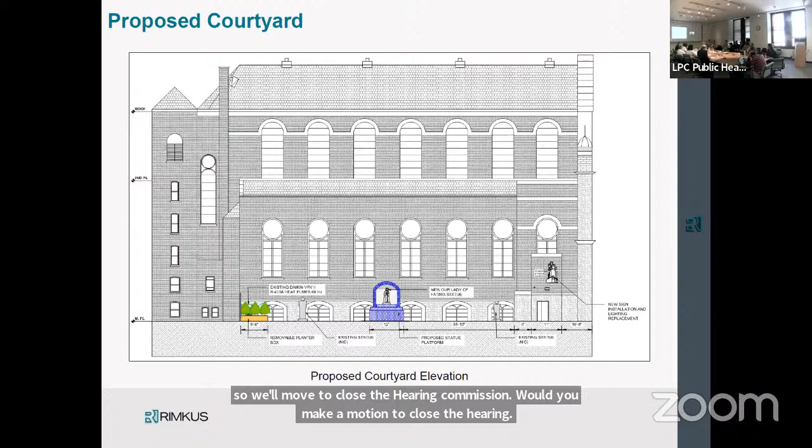Any opposed? Okay. So we have, I think, sort of 4 components to this application. One is to replace the paving in the courtyard to address drainage issues and to upgrade the materials. So that would include bluestone in the front of it with a walkway behind of concrete, to legalize HVAC units at the far eastern end of the courtyard that would be concealed from view by evergreens in planters, and to replace

the base and shift the location and setting for the statuary in the center of the courtyard to help elevate it, protect it from vandalism, and to install signage at the elevator bulkhead by shifting the statuary slightly there and adding a light fixture underneath the statue, the relief, and the signage. So there are 1, 2, 3, 4 areas of work.

So we'll begin our discussion. Commissioner Jefferson, would you start this one?

When I looked at this project, I got extremely excited by it because it reminded me of my trip to Italy and Greece, and the idea of a place where statues were gathered and you could walk by and see these beautiful statues of the past. And I particularly liked the history of the statues, from where they came from, how they arrived at this place. And I thought that the materiality they were using in the proposed courtyard was a beautiful kind of base for the statue. I think everything they have proposed is really well done.

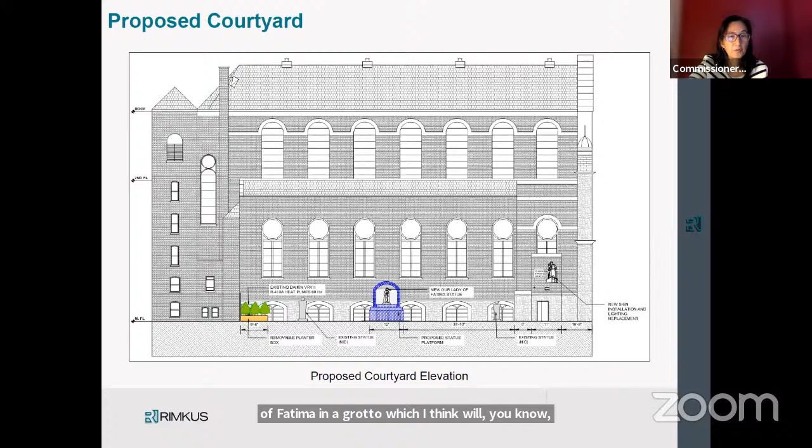Okay, thank you. All right, so we have a lot of support for this application. We have enough support to approve it as is today. There were some suggestions made. You're welcome to think about those some more, and as you develop the details and work with staff on that. But for now, I think we can make a motion to do a straight approval. Are you comfortable with that, Commissioner Jefferson? Okay, great. Go ahead. Yeah, that would be great.

In the matter of LPC 24-08053, 153-159 Sullivan Street. Application is to install HVAC equipment and planters, relocate and replace statuary, and install signage.

I know that the building style, scale, material, and details are among the features that contribute to the special architectural and historical character of the Sullivan-Thompson Historic District. Staff further notes that the Houston Street North facade was designed as a secondary facade and exposed when Houston Street east of 6th Avenue was widened in the early 1930s. I recommend approval, finding that the proposed work will not eliminate or damage any significant architectural features.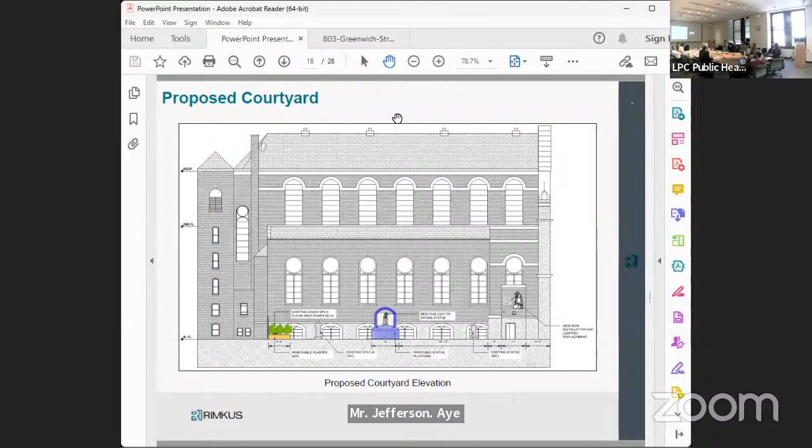Second. All right, John, will you call the vote? Chair Carroll, aye. Vice Chair Bland, aye. Commissioner Chapin, aye. Commissioner Chu, aye. Commissioner Ginsburg, aye. Commissioner Goldblum, aye. Commissioner Jefferson, aye. Commissioner Lutfi, aye. Commissioner Master, aye. Nine in favor, none opposed. The motion passes, that's approved. Thank you very much.

Move to the next item. Right, next item is public hearing item number 6, LPC 25-00981, an application for a certificate of appropriateness in the Borough of Manhattan, Block 625, Lot 3, 803 Greenwich Street in the Greenwich Village Historic District. This is an Italianate-style row house built in 1858, and the application is to alter the ground floor of the front facade and install new infill and to modify the rear facade.

My name is Ilya Vilnitz, I'm the architect for the project. This is 803 Greenwich Street. Today, we're here to request approval for the resurfacing of the front facade ground floor with brownstone colored stucco and combining masonry openings at the rear of the building.

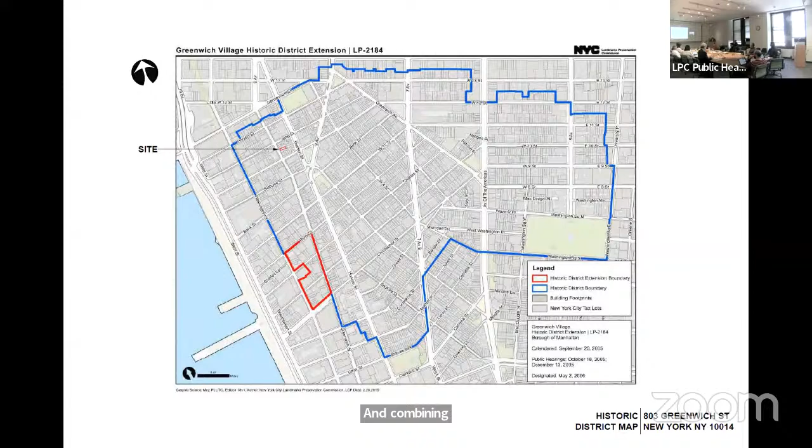This is the site in the Greenwich Village Historic District, located between Jane Street and West 12th on Greenwich Street. This is the 1940s tax photo along with the designation photo, and here's the historic tax photo side by side with the proposed rendering.

There are three existing piers, this one, this one, and this one here. The fourth pier here has been approved at staff level to be rebuilt out of brick masonry, and the two swing doors on either side have also been approved at staff level, as is the garage door. So as part of this presentation, we would like to propose to resurface the four piers in brownstone colored stucco.

This is our reference plan from the 1920s that shows a similar configuration of the front facade with the two swing doors and a center garage door.

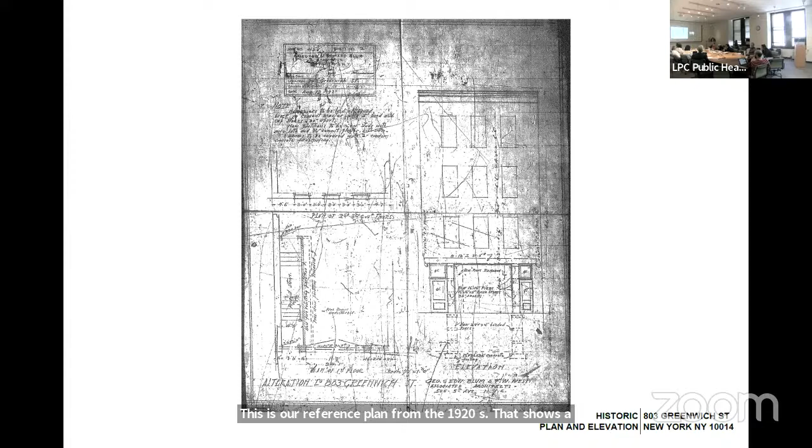We probed the existing piers from the interior to uncover the historic brick masonry behind. We didn't probe the exterior because we believe the existing cementitious coating has bonded to the brick, and during that probe we were afraid to damage that historic brick. So we only have that probe of the interior of the building.

Here is the rendering side by side with the existing elevation. Under staff level review, we have approval to resurface the sills and headers of the windows from the 2nd to 4th floor, and we would like to use that same resurfacing recipe for the ground floor of the building.

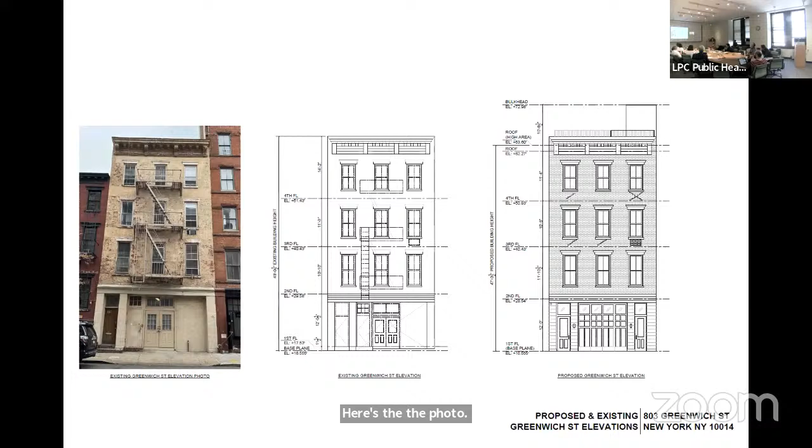As it relates to the neighbors, the building on the left has a brownstone colored coating at the base along with the brick above. The building on the right has cementitious coating on their piers as well, and we would match the score joints of that coating on our building to create a harmonious appearance. Here is the photo of the existing condition along with the plans of the existing and proposed condition.

Throughout the district, this is a very common arrangement of buildings with a brownstone colored base and masonry above. Here are some examples of buildings in the district of similar age and type.

I'm moving to the rear of the building. The reason why this is a public hearing item is because we're combining masonry openings at the third floor. So the 3 punched openings, we would like to combine them into 2. And the black framing element along with the balcony are part of that combination.

So as you can see, the third floor windows, we'd like to combine from 3 windows to 2 and create a frame that is required because of a structural intervention that I'll mention at a subsequent slide. The frame is made out of a fly ash cladding material in a shaker style. And the balcony is a 2-foot cantilevered projection that would house planters that would provide privacy for the bedrooms behind those 2 new windows at the third floor.

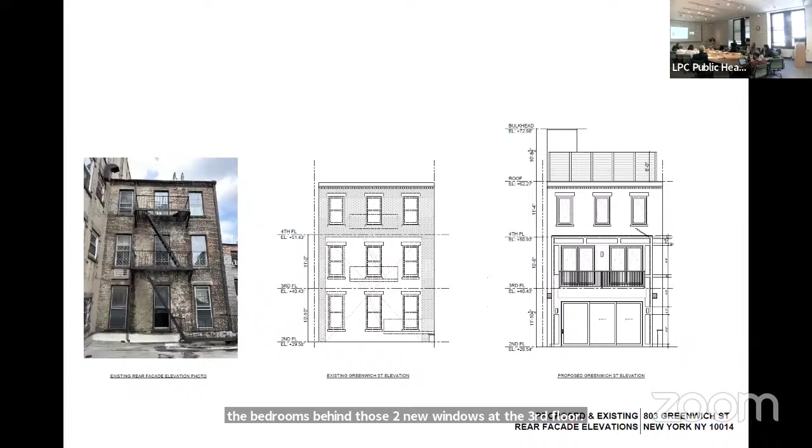Here's the elevation of the proposed elevation and the proposed and existing photograph.

This building, we're changing out the floors of this existing building from combustible to non-combustible, and for the building code, that triggers a lateral system as if the building was built today. So we're proposing to introduce a structural moment frame system at the rear of the building that's coplanar with the rear facade. And this, as you can see here, this beam right here, so this column right here. And because of this, we would need to step out 3 inches with that black frame in the previous image to provide a cladding material, insulation, and waterproofing elements to waterproof that portion of the facade around the structural elements.

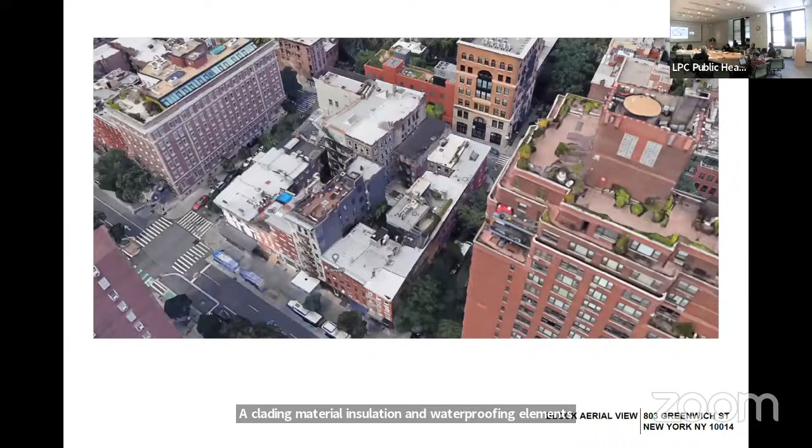This is the aerial view of the block of the building. As you can see, the rear facade is located here. It's completely not visible from public thoroughfare. It's located on a very unique utilitarian block. And here's the view from the rear yard. As you can see, also surrounded by utilitarian buildings.

Sarah had to step out just for a minute.

Yeah, so questions, I have 2. One, in the rear rendering, the top floor, the fire escape is still there, and then in the elevation it isn't. I presume the elevation is correct, but I want to confirm that. Yes, we're removing the fire escape. Then the second question, on the rear rendering above the 3rd floor, there's some sort of screening, and I wondered what that was. That is a staff level approval item as well. Thank you. Other questions?

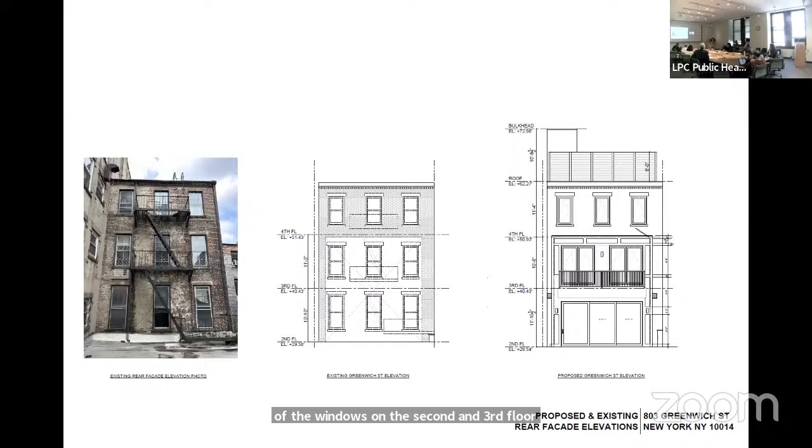Yes, so Michael. The whole inset of the windows on the 2nd and 3rd floors is to accommodate the steel. The projection of this black frame is to accommodate the steel. And what happens on the 4th floor? You don't need to take it up there? No, the steel stops at the floor of the 4th floor. Could you set the steel behind the wall to the left and right and not necessitate that moment infill?

The frame is doing two things. It's providing a lateral structure and it's also providing the support for the fourth floor masonry above. Again, why couldn't you put, I mean, what's the span, 25 feet, 20 feet? This is 25 feet. Yeah, so it won't span across the extra few feet if you slipped it behind the little walls to the left and right there? I think that the engineer would like the beam to be directly underneath the wall so as to take that force directly underneath, so as not to create a torsion effect. We actually looked at that and they prefer it to be coplanar with that wall. They're also tying in the columns with the brick so as to make it all kind of one element.

But you're removing the brick. You're removing the brick at the spandrel, right? Because that's taking place at the facade line. So there's no more brick left, right? This column here is being tied into this brick. In order to create a unified function.

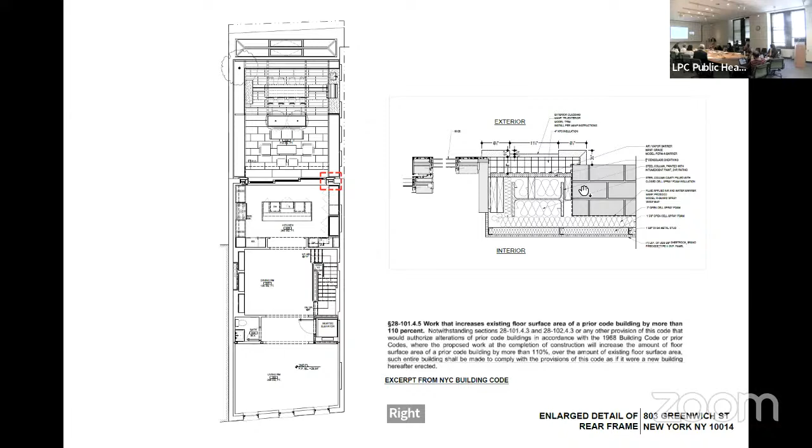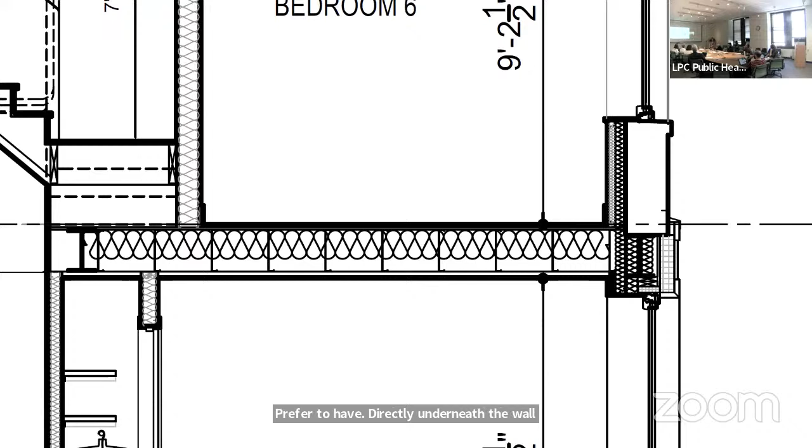And I'll just skip to the section. I guess it was, is the appendix here? Yeah, there it is. So here, right, I see it, so this beam is acting as a support for the fourth floor. And you're saying to move it back, here? Yeah, I think then there would need to be a bigger structural intervention to account for that torsion effect, which the engineer preferred to have directly underneath the wall. But the whole floor structure is new anyway. The floor structure is new, yes, but this masonry wall is existing. Thank you.

Any other questions? Yeah, Commissioner Jefferson. Go to the front elevation, proposed and existing elevation. Maybe it's my eyes, the front facade.

Are the two doors the same size? These doors are not the same size. Per our reference image from the 1920s, the doors were different sizes here. They're two different sizes. Correct. Oh, okay, got it. Wasn't just you. I thought my eyes were going, okay.

All right, anyone else? All right, let's see. I'll note that there's no one in the hearing room to testify, so I'll turn it to Gregory to see if there are any remote participants. Thank you, Chair Carroll. I do not see any hands raised in the remote list. If you'd like to testify, please click the raise hand button now.

Noting that there are still no hands raised, I will state for the record that Manhattan Community Board 2 recommends approval of the stucco finishing of the piers at the first floor front facade, approval of the rear facade first and second floor windows and the balcony, denial of the modern interpretation of the front facade first floor commercial configuration, and denial of the black color of the rear facade structural screen, and that it be in a color with historic reference similar to the painted brick at the upper stories. And with that, I'll bring it back to you, Chair Carroll.

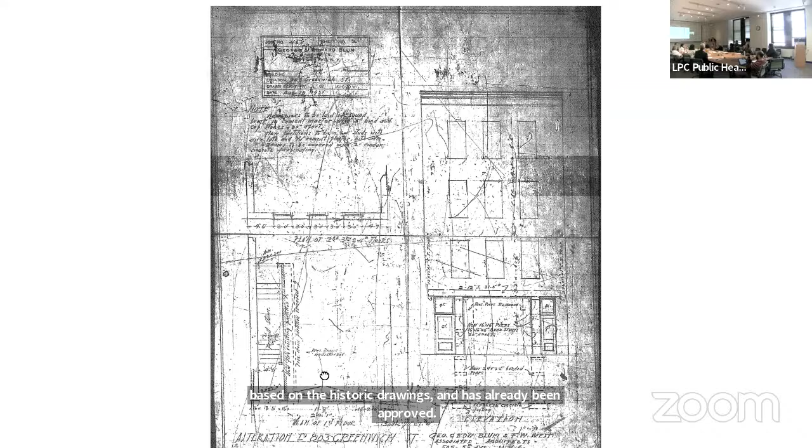The door on the left is the primary entrance. It's the ADA 36-inch door. And the door on the right is more of a secondary entrance. But the reinserted pier, which defines the width of that opening, is based on the historic drawings and has already been approved. So we're really looking at the material of that pier. The dimensions were on the plan as well that we followed here. Even in the drawing, the door on the right is skinnier. Oh, I see. Got it.

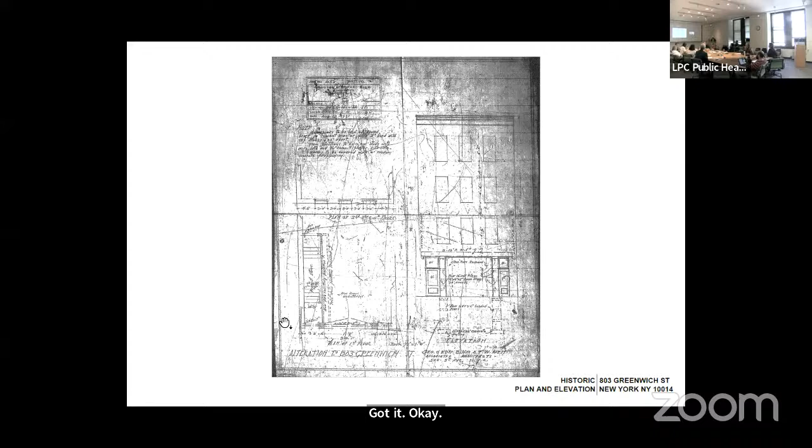So we have two components before us today. One is that the applicant is seeking to replace the stucco at the ground floor piers with a new sandstone or brownstone colored stucco. And for a pier that was previously approved by staff to be in brick, they would like to build that in stucco to match the rest. Then at the back, the application is to combine the window openings in a black framed window system. The back is not visible from the rear, and there'd be no significant features being removed.

So we'll begin our discussion. Commissioner Lutfi, would you start this one? Sure. This is a very attractive project on both sides, and I appreciate your efforts.

I think the question is the piers, and whether or not there should be some further exploration as to whether or not the historic piers could be restored. Mark had mentioned doing a probe, and I would recommend that you at least try it, because the project would look even better. It's already a very nice project, but it'll look even better. So that's my recommendation. And as I said, the back is not visible. I happen to think it works in addition.

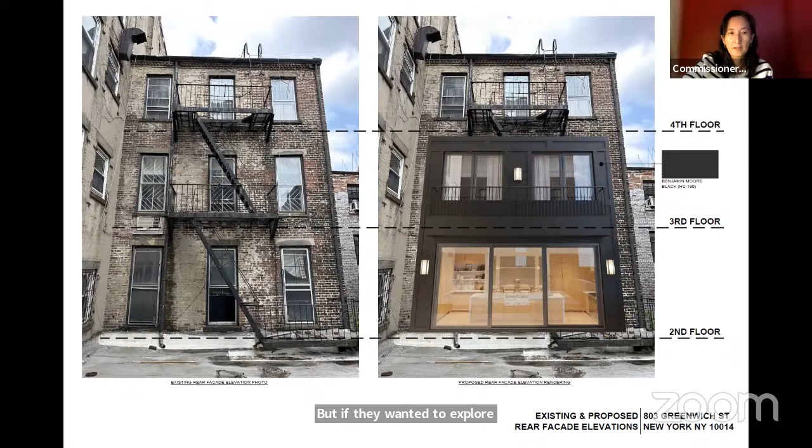In the front, I think the front is fine, but I think they should do a probe and see what they can retain. In the rear, for me it's very compelling that this isn't visible from a public thoroughfare, so I think they are fine with this as is. But if they wanted to explore what Commissioner Chu had mentioned, I think that's fine as well. So I can find this appropriate.

Okay, all right, so I think where we are on this is that we can make a motion to approve the project with two modifications: one, that they do a probe at the existing pier just to see what that material is, and two, that they align the infill for the rear openings with the jambs of the windows above. And that's it. Okay, Commissioner Lutfi, could you do that? Okay, great, yep.

I just want to look at one thing. Okay.

In the matter of docket 25-00981, 803 Greenwich Street, Greenwich Village Historic District, an Italianate style row house built in 1858. The application is to alter the ground floor of the front facade, install new infill, and modify the rear facade. I note that the building style, scale, materials, and details are among the features that contribute to the special architectural and historic character of the Greenwich Village Historic District.

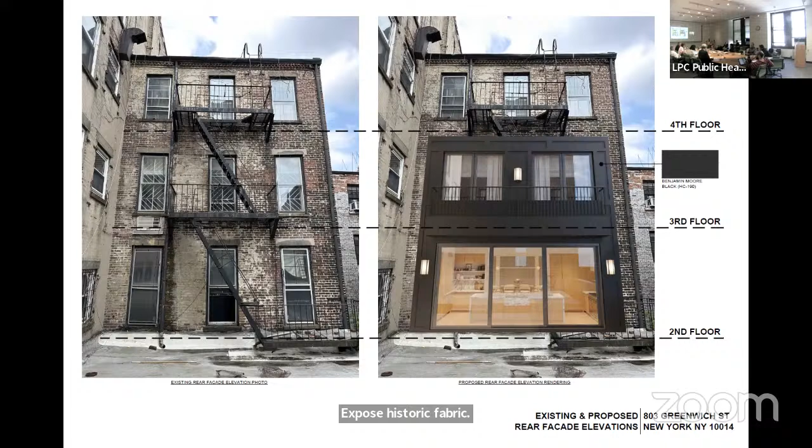I also note that a garage entrance was created at the base of the building in the early 20th century. I recommend approval with some modifications, finding that the ground floor piers were originally designed with brick and stone bands but are now fully coated with modern stucco that may have damaged the surface, and the proposed recoating will not conceal any currently exposed historic fabric. The stucco cladding will be consistent in material and character with the early 20th century stucco claddings found at the base of some commercial buildings within this historic district, including neighboring buildings within the streetscape. The scored stucco will match the brownstone at the building's upper floor lintels and sills in terms of color and texture, helping to unify the facade.

That the alterations of the rear facade will not be visible from a public thoroughfare, eliminate any significant architectural features, or diminish the overall predominance of masonry and solidity at the rear facade. And that the combination of masonry openings, the slight projection of the assembly, and the polymer material of the siding at the secondary rear facade, situated within a tightly enclosed corner of the block, will not detract from any significant architectural features of the building or others on the block.

However, I recommend that the applicant conduct probes at the exterior sides of the piers in consultation with commission staff to see if the masonry piers can be restored. And I also recommend that the metal projection in the rear, on the rear facade, align with the window jambs above.

Okay, thank you. All right, Commissioner Chu, would you second that motion? Second. John, will you call the vote? Chair Carroll, aye. Vice Chair Bland, aye. Commissioner Chapin, aye. Commissioner Chu, aye. Commissioner Ginsburg, aye. Commissioner Goldblum, nope. Commissioner Jefferson, aye. Commissioner Lutfi, aye. Commissioner Master, aye. 8 in favor, 1 opposed, the motion passes.